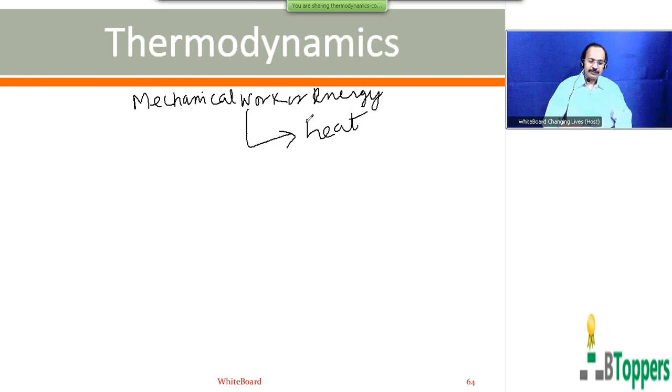So I am going to discuss about heat engine, then about the Carnot's ideal heat engine.

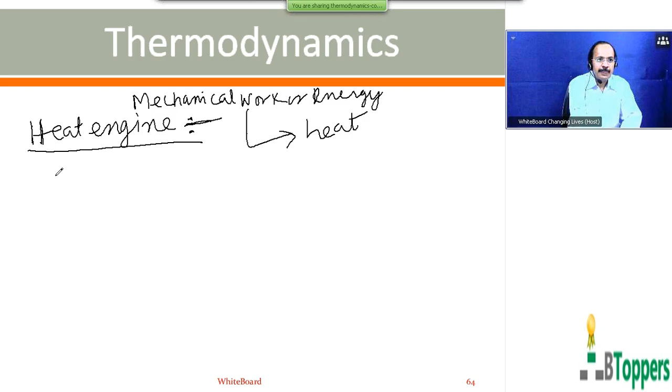So heat engine is a device which works in a cyclic process so that it converts heat into work. As I discussed earlier, when a system undergoes a cycle of processes so that it returns to the original state.

That means the system undergoes one or more processes so that the system passes from one thermodynamic equilibrium state A to another thermodynamic equilibrium state B. Then the system returns back from state B to the state A by one or other process.

The system finally returns to the initial state, so the net change in energy for the complete cycle will be zero. When you apply the first law of thermodynamics for a cyclic process, we can say the net amount of work done by the system in a cycle is the same as the net quantity of heat energy absorbed by the system during the cycle. So a heat engine is a device which works in a cyclic process.

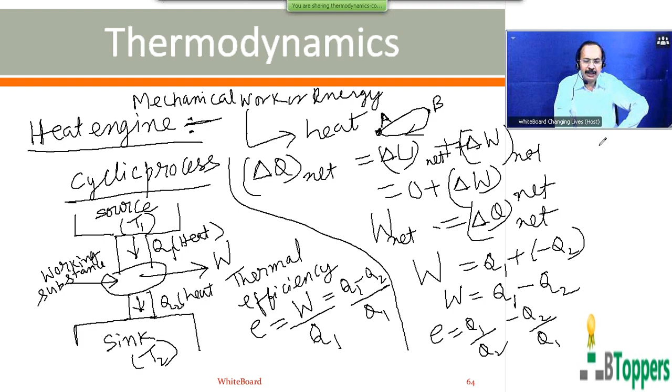So thermal efficiency of a heat engine is defined as the ratio of the work done by the working substance during each cycle to the heat absorbed by the working substance from the source during each cycle. Or you can write it as Q1 minus Q2 by Q1, which can be written as Q1 by Q1 minus Q2 by Q1. So thermal efficiency of a heat engine which works in a cyclic process is given by E equal to 1 minus Q2 by Q1.

So if you want to calculate the percentage efficiency, you have to multiply with 100.

Already I have shown you these definitions in the previous class. Again I am showing the same definitions in this class. In case you have not copied these definitions, please copy them. You can take a pause and copy these definitions. I have already discussed the definition for quasi-static process, then reversible process. So in case you have not copied these, please take a pause and copy them.

Next I am going to show you the conditions, but once again I will read the definition for reversible process. A reversible process is one which can be reversed in such a way that all changes taking place in the direct process are exactly repeated in the inverse order and opposite sense, and no changes are left in any of the bodies taking part in the process or in the surroundings.

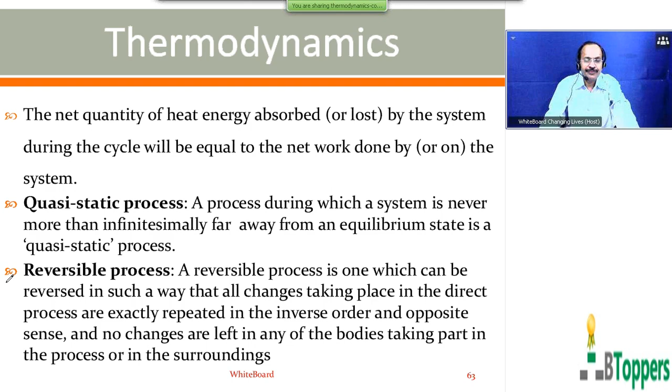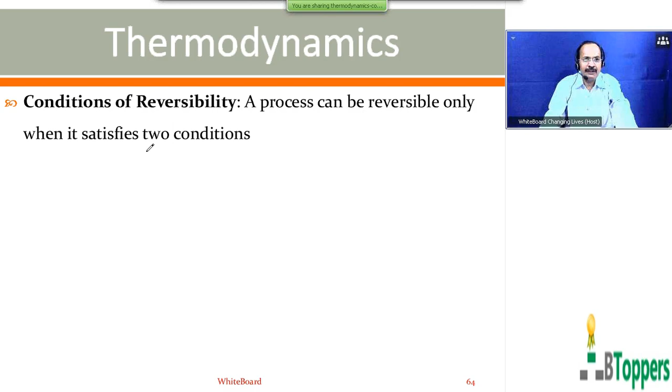Next I am going to show you the conditions that must be fulfilled to achieve a reversible process in practice. Look at the conditions of reversibility. A process can be reversible only when it satisfies two conditions. The first condition is that dissipative forces such as friction, viscosity, inelasticity, electrical resistance, magnetic hysteresis, etc. must be completely absent. That is the first condition.

Because if dissipative forces like friction, viscosity, etc. are present, then a part of the initial internal energy of the system may be lost during the direct process. Then when you try to reverse the process, again some more energy may be lost. So it cannot return the system completely to the initial state when the cycle is completed, because there may be a loss in the internal energy of the system if dissipative forces are present.

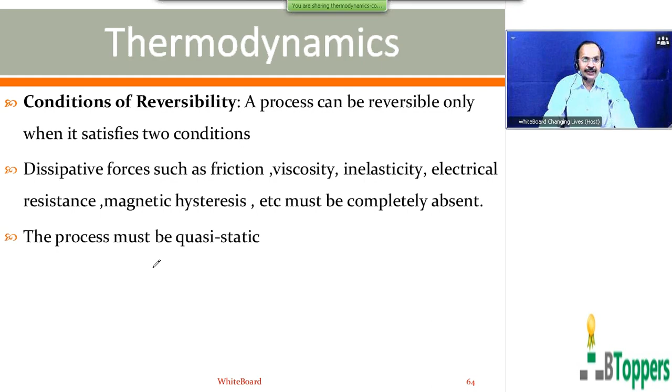Then the second condition is that the process must be quasi-static. So these two are the conditions for a process to be reversible.

And another conclusion I told you, which you have to remember for the time being - later you'll get a more clear explanation after completing the discussion about heat engines. The conclusion is: complete conversion of work into heat is possible, that is, we can convert a given quantity of work completely to heat. The reverse process, however, is not possible. We cannot make a device by which a given amount of heat can be completely converted into work.

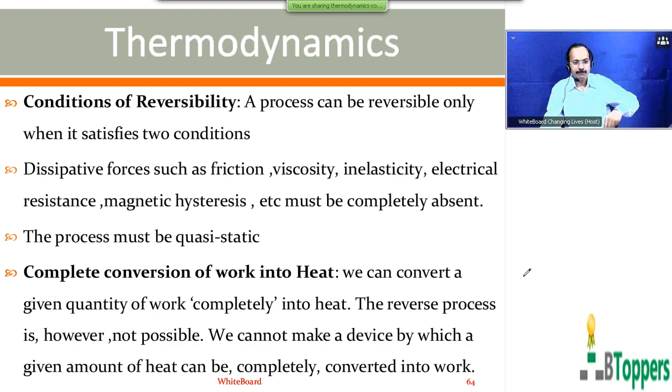Next, heat engine. So I am first giving you a definition for heat engine. Any cyclic device by which heat is converted into mechanical work is called a heat engine.

I have shown the schematic diagram for the heat engine. There are three main parts in an engine: a hot body called source, a working substance, and a cold body called sink. The working substance takes in heat from the source, converts a part of it into useful work, and gives out the rest to the sink. This series of processes is called a cycle, since the working substance returns to its original state.

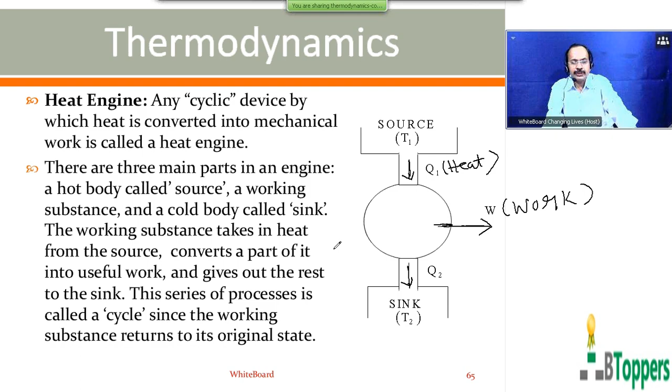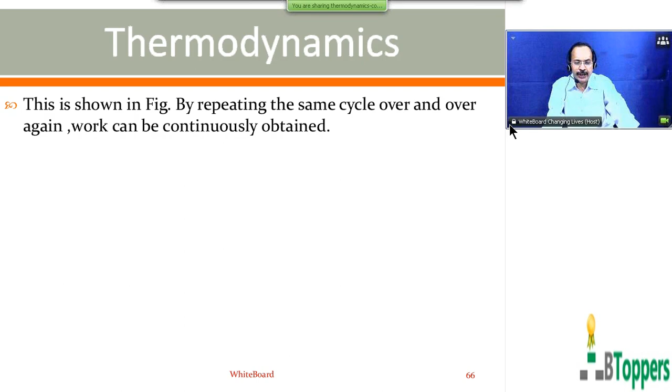So next I am going to show the notes continuation to this. This is shown in the figure. By repeating the same cycle over and over again, work can be continuously obtained.

Suppose the working substance takes in an amount of heat Q1 from the source and gives out an amount Q2 to the sink. Suppose W is the amount of work obtained in each cycle. The net amount of heat absorbed by the substance in each cycle is Q1 minus Q2, which has been actually converted into work.

Applying the first law of thermodynamics to one complete cycle, as I told, net heat absorbed by the system is equal to work done by the system in each cycle. We get Q1 minus Q2 equal to W.

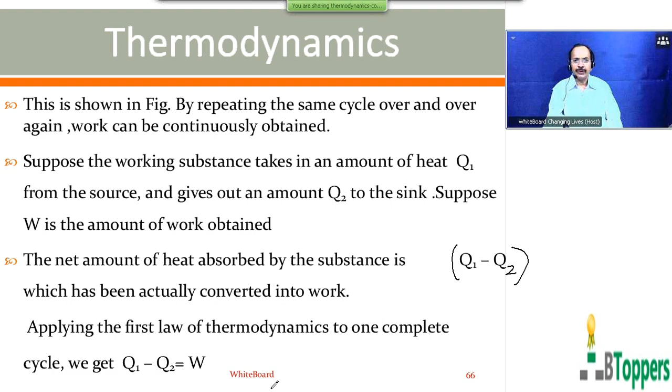Thermal efficiency: the thermal efficiency of an engine is defined as the ratio of the work obtained to the heat taken in from the source. That is, E equal W by Q1. Since W equal Q1 minus Q2, so E equals Q1 minus Q2 divided by Q1, or you can write 1 minus Q2 by Q1.

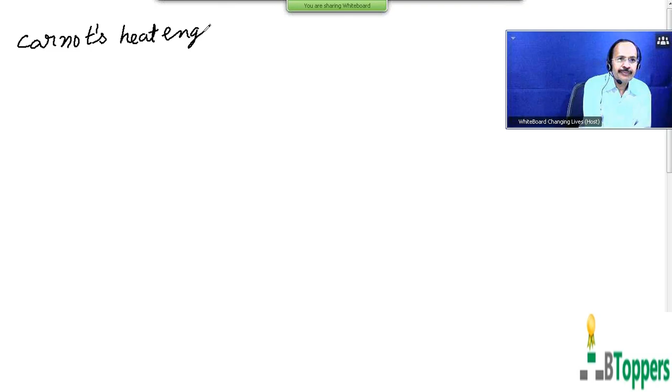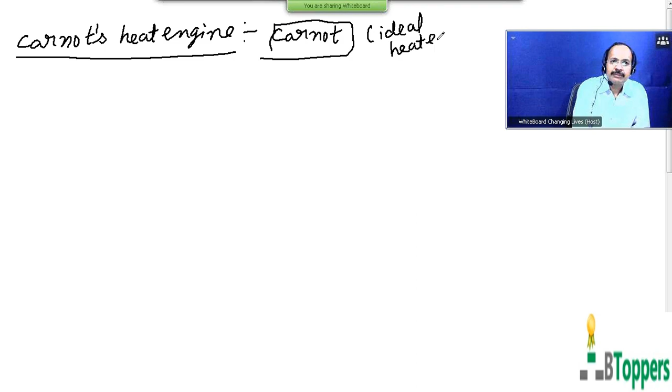So, a scientist by the name Carnot has developed a plan of ideal heat engine. The ideal heat engine means a heat engine which has the maximum possible thermal efficiency for given temperatures T1, T2 of source and sink. So Carnot developed a theoretical plan of ideal heat engines, which is called Carnot's heat engine.

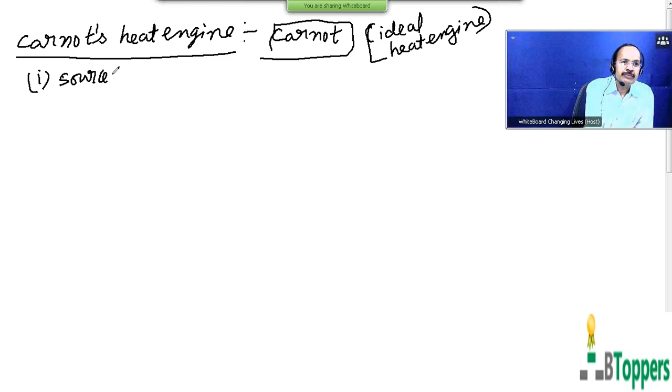The working substance undergoes a cycle of processes in this Carnot's heat engine, so that during each cycle, the same fraction of heat absorbed from the source gets converted into work. The important parts of the Carnot heat engine are: a hot reservoir of infinitely large thermal capacity at constant higher temperature T1, which is called the source.

A hot body or hot reservoir of infinitely large thermal capacity at constant higher temperature T1. Why should we say very large thermal capacity? What do you mean by saying large thermal capacity? Why should it have large thermal capacity? One may get a doubt.

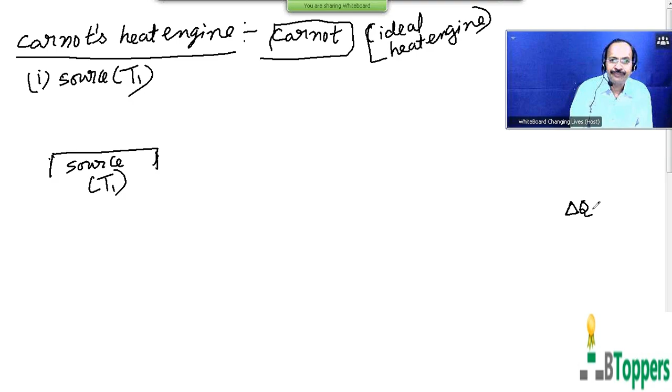Quantity of heat energy lost by a body when its temperature falls is equal to mass of the body into specific or thermal capacity of the body into fall in temperature, or decrease in temperature.

So decrease in temperature or fall in temperature of a body, when it loses some heat without change of state, is equal to quantity of heat lost by thermal capacity. So if thermal capacity is very large, it implies that there will not be any fall in temperature, or there will be negligible change or fall in temperature of the source when the source loses some amount of heat, Q1, during each cycle.

So we are discussing the important main parts of the heat engine, Carnot heat engine. First, the Carnot heat engine must contain a hot body or a hot reservoir at constant higher temperature T1 of the source, which we call source here, which has infinite large thermal capacity. So a hot body of infinite large thermal capacity called source at constant temperature T1 of source is required.

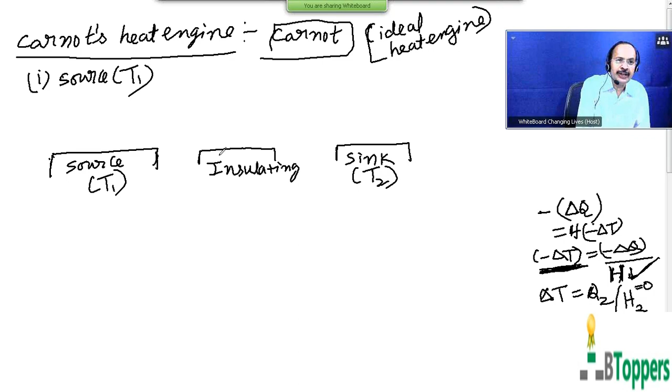Then, insulating - heating, insulating means heat insulating stand.

So I am discussing the important parts of the Carnot heat engine. For this, first we should have a hot body or hot reservoir of infinitely large thermal capacity at constant temperature T1. A cold body or cold reservoir of infinitely large thermal capacity at constant lower temperature T2, which is called sink, and a heat insulating stand, adiabatic surface.

Then a working substance is required to carry out the cyclic process. So then there must be a working substance. The working substance in the Carnot heat engine is an ideal gas taken in a cylinder. The cylinder is provided with a frictionless movable piston.

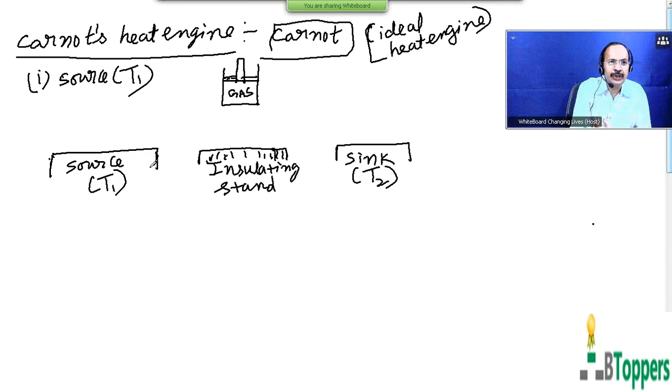So Carnot heat engine consists of these four parts. One is a hot body or hot reservoir at constant higher temperature T1. All of you please concentrate, just listen - I will show you the notes separately. At constant higher temperature T1 with very large thermal capacity, so that it is able to supply heat energy at constant temperature T1. Another cold body or cold reservoir at constant lower temperature T2, which has very large thermal capacity, so that its temperature T2 can be assumed to be constant, even if it receives some heat during each cycle.

And a heat insulating pad or stand or adiabatic surface to carry out adiabatic process. And there must be a working substance. The ideal gas is taken as working substance in Carnot heat engine, which is taken in a cylinder with frictionless movable piston. So weights can be placed on the piston

and which can be increased to change the pressure of the gas, which can be changed. The weights on the piston can be altered, and the cylinder can be moved. The working substance can be transferred from one of these - from source to sink or to insulating stand - without performing any work on the working substance.

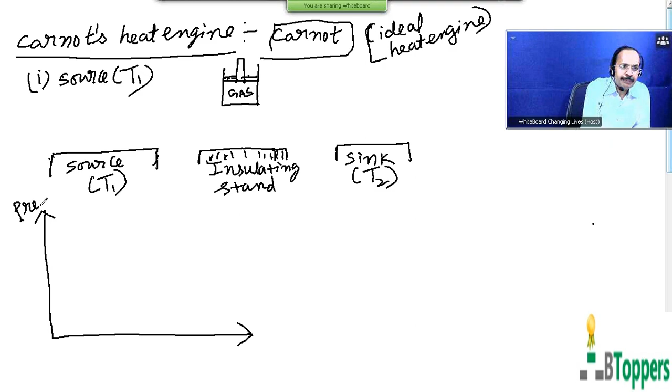So the Carnot plan of ideal heat engine - the working substance will undergo 4 processes, and these processes can be shown in the indicator diagram. That is a graph of pressure along y-axis with volume along x-axis, which we call indicator diagram.

First, the cylinder containing the gas is kept in thermal contact with the source at temperature T1, so that the weights on the piston are slowly decreased so that the gas expands isothermally at constant temperature T1.

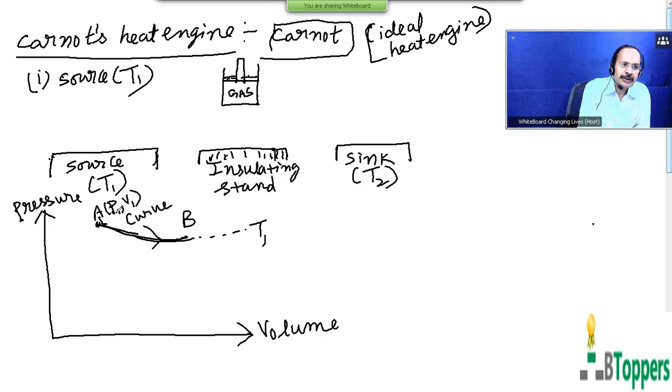During isothermal process, as discussed in the past, the pressure volume graph or PV graph will be a rectangular hyperbola. So the curve AB is not a line, it will be a curve, a rectangular hyperbola. A represents the initial state of the gas or working substance, where pressure is P1, volume is V1 or VA. Pressure is P1 or PA, volume is V1 or VA. At point B, pressure is P2 or PB, volume is V2 or VB. So the gas is expanded isothermally.

By decreasing weights on the piston, until the state B is reached from state A. Next, the cylinder containing the gas undergoes this isothermal expansion.

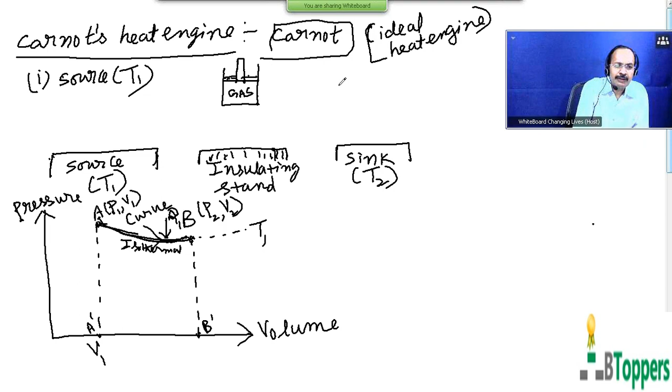During this isothermal expansion, amount of heat Q1 is absorbed by the working substance from the source. This Q1 can be calculated as already explained earlier about isothermal process. The heat absorbed by the ideal gas during isothermal expansion is the same as the work done by the gas during the isothermal expansion. In isothermal process, change in enthalpy will be 0. Heat energy absorbed by the gas in isothermal expansion from the source is the same as the work done by the gas during the expansion from A to B.

Work done by the ideal gas during isothermal process is given by mu R T times log to the base e of the ratio of final volume to initial volume, V2 by V1 or VB by VA. The temperature of the source is constant at T1.

Next, the cylinder containing the gas is placed on the insulating stand and weights on the piston are further decreased so that the gas is again slowly expanded. Remember that each process in Carnot's plan of heat engine is a reversible process and each process is a quasi-static process, assumed to be carried out very, very slowly.

So the gas is next expanded adiabatically. That means the cylinder containing the gas is placed on an insulating stand so that no heat transfer takes place between the gas and the surroundings. The gas is allowed to expand until the temperature of the gas falls to T2, which is the temperature of the sink.

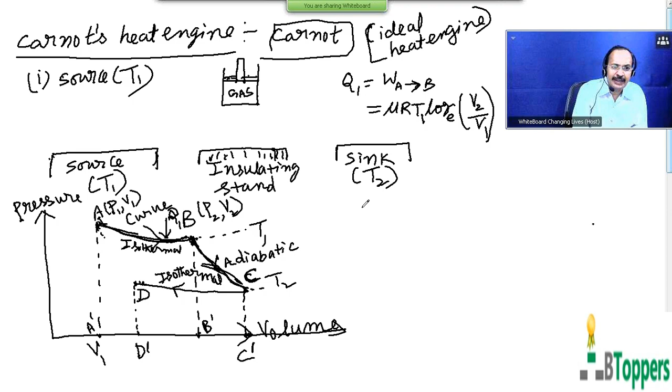During this isothermal compression, work is done on the gas and heat energy is lost by the gas to the sink, as explained earlier for isothermal process. If you want, you can go through that class again for isothermal process. Whatever work is done on the gas during isothermal compression will be equal to the heat energy lost by the gas to the surroundings. That means work done on the gas during the isothermal process is equal to the heat lost to surroundings.

So Q2 is the heat given to the sink, or lost by the system during the isothermal compression.

So in isothermal process, delta U is 0 from first law of thermodynamics, where delta Q is equal to delta U plus work done. So in the process CD shown in the indicator diagram, delta Q, heat energy absorbed, will be negative, or minus Q2, since heat energy is lost by the gas. Delta U is 0. So work done in the process from C to D is calculated using the same formula for work done in the isothermal process.

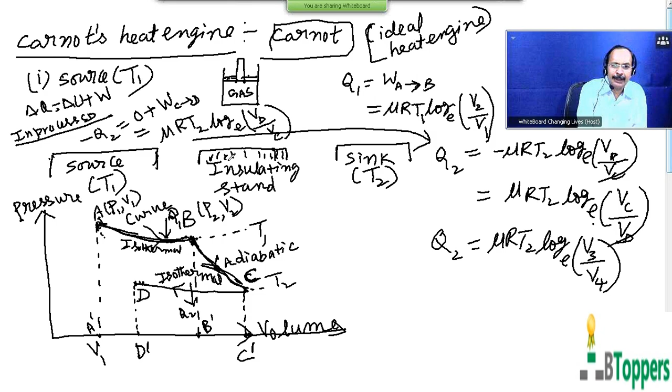Then the gas is finally again kept on the insulating stand, and the gas is again compressed by increasing the weights on the piston further adiabatically until, in adiabatic compression, temperature of the gas increases as explained earlier. The cylinder containing the gas is placed on the insulating stand, and the gas is slowly compressed by increasing weights on the piston until the temperature rises back to the original value T1, so the gas ultimately returns to the original state A at the beginning of the cycle, completing the cycle. During this adiabatic process, no heat is lost or gained by the gas.

Now, work done by the gas in the adiabatic process, as explained earlier, is given by - now we are discussing the calculation of thermal efficiency, for which you have to find the ratio of Q2 by Q1. Work done in adiabatic process is given by

nu into R into Ti minus Tf by gamma minus 1. So work done in the adiabatic process from B to C.

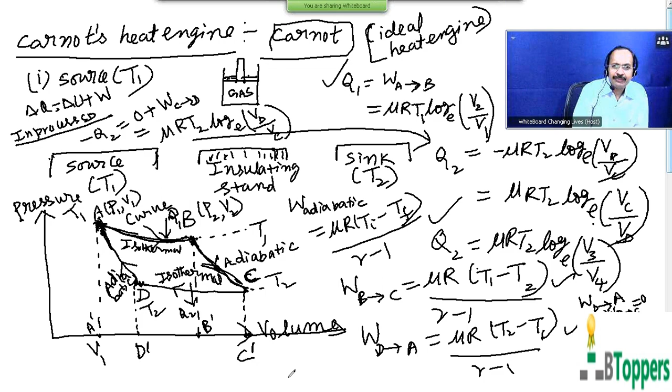Therefore, net work done for a complete cycle, as I told you, can be written as Q1 minus Q2. If you divide Q1 with Q2, nu R gets cancelled.

As I was discussing, Q1 represents the amount of heat absorbed in isothermal expansion represented by the curve AB, that is equal to work done in isothermal expansion, equal to nu RT1 log to the base e of final volume at B divided by initial volume at A. Final volume at B is V2, initial volume at A is V1.

So in the isothermal compression C to D, the heat absorbed by the gas in an isothermal process in general is equal to work done by the gas. Heat absorbed can be written as minus Q2 in the process C to D. Work done by the gas in the process C to D is nu RT2 log to the base e of final volume at D divided by initial volume at C, or nu RT2 log to the base e of V4 by V3.

You multiply with a minus sign, you can write Q2 as nu RT2 log to the base e of V3 by V4. Now to divide Q1 with Q2.

Q1 by Q2 equal to nu R T1 by nu R T2, log to the base e of V2 by V1 divided by log to the base e of V3 by V4.

Now the points B and C lie on the adiabatic curve. In the adiabatic process, TV to the power gamma minus 1 is constant.

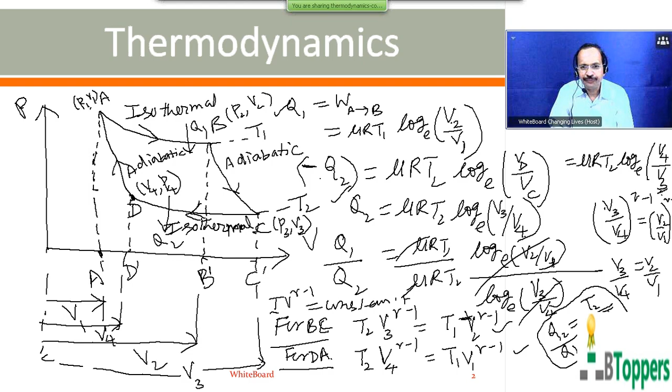Those who are writing the notes, please get ready with your notebook and pen. I am going to show you the notes for Carnot heat engine. Even though you are not writing the notes, please look at the screen and go through the summary of the discussion I have done for Carnot heat engine, systematic notes particularly required for the preparation of your board exam.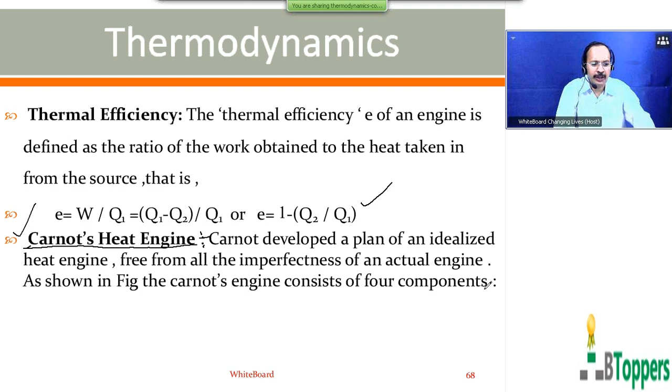As shown in the figure, Carnot engine consists of 4 components. 1. A cylinder with perfectly heat insulating walls but a perfectly conducting base, and closed with a tight fitting, perfectly insulating and frictionless piston. Those who are writing the notes, please take a pause and finish writing.

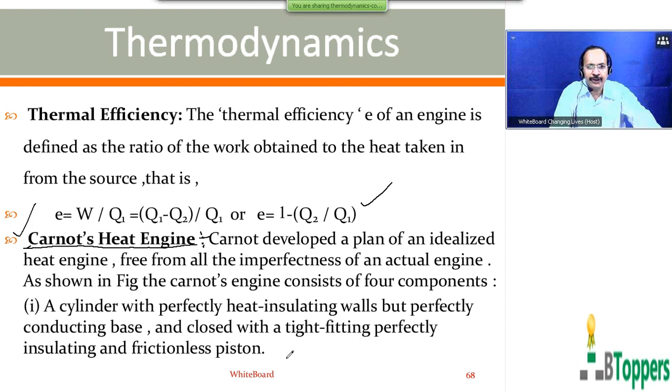I am going to show the next slide, a continuation to this. Then a fixed mass of a gas, the working substance, filled in the cylinder, and some weights are placed on the piston of the cylinder.

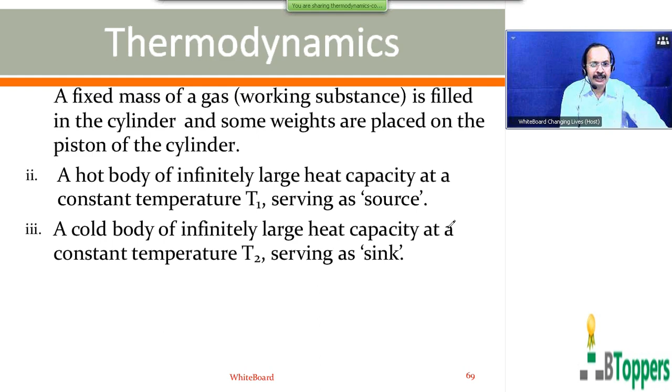Second, a hot body of infinitely large heat capacity at a constant temperature T1, serving as source. Third, a cold body of infinitely large heat capacity at a constant temperature T2, serving as sink. Fourth, a perfectly heat insulating stand.

The cylinder may be placed on any of the 3 bodies 2, 3, and 4, and may be moved from one to the other without doing any work on the gas. Come on, take a pause and finish writing the notes up here. I am going to show the continuation to this.

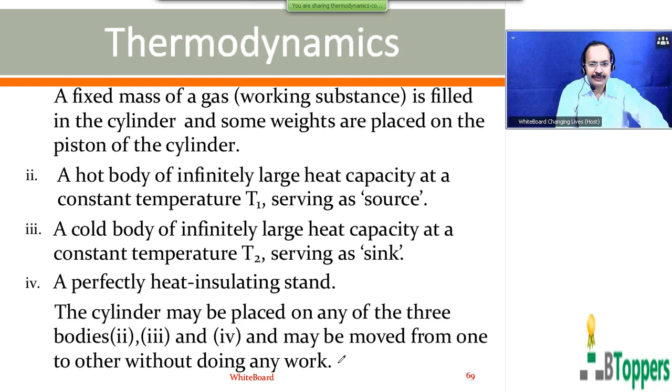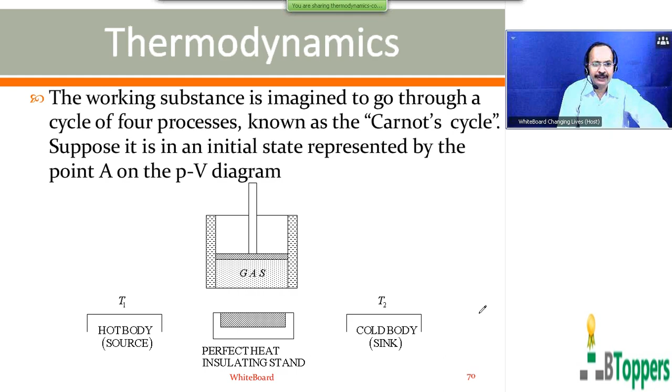The working substance is imagined to go through a cycle of 4 processes known as the Carnot cycle. Suppose it is in the initial state represented by the point on the PV diagram. Copy the figure, take a pause and finish copying. I am going to show the next.

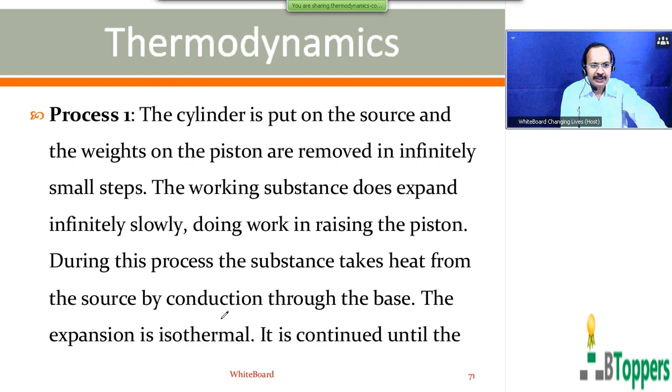Process 1: the cylinder is put on the source and weights on the piston are removed in infinitely small steps. The working substance expands infinitely slowly, doing work in raising the piston. During this process, the substance takes heat from the source by conduction through the base. The expansion is isothermal, continued until the state represented by point B is reached. The curve AB represents the isothermal expansion of the substance at constant temperature T1 of the source.

Come on, copy the graph. Take a pause, please copy the graph.

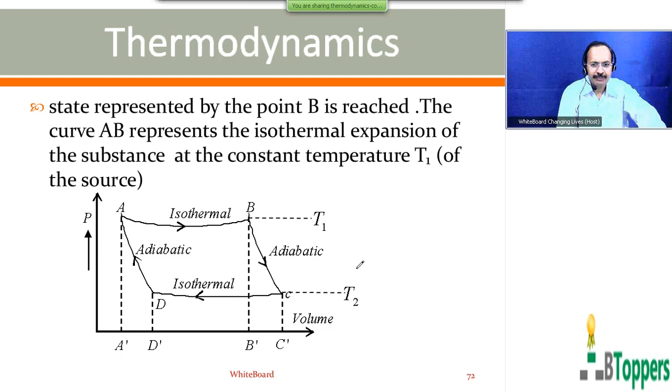Process 2: the cylinder is put on the heat insulating stand, and by further removing the weights on the piston, the substance is further expanded. This expansion is adiabatic because no heat can leave or enter the substance through the insulating cylinder. The substance does work in raising the piston and its temperature falls. The expansion is continued until the temperature falls to T2, the temperature of the sink. It is represented by the curve BC.

So I will continue this discussion of notes in my next class. Please finish writing the notes up to here.